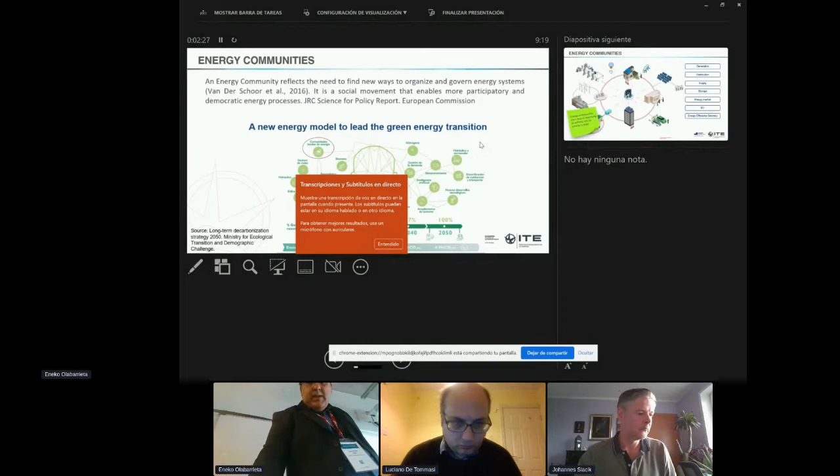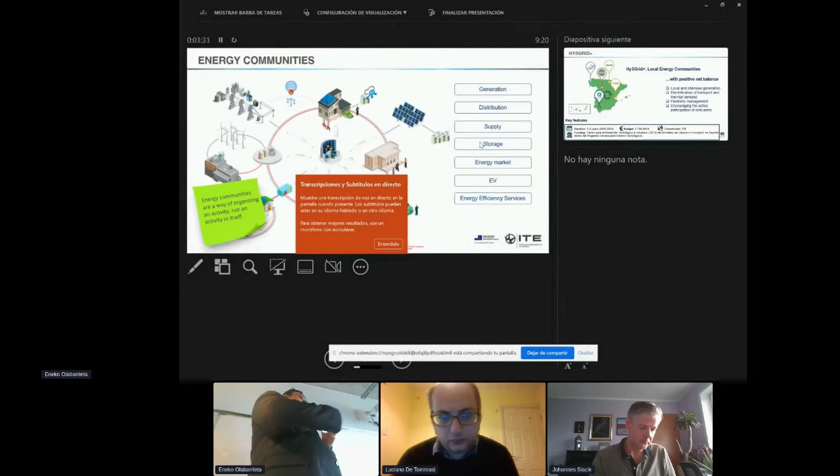Okay. Talking about energy communities, the energy communities are composed of several issues that I can show in this slide, such as generation, distribution, energy supply, battery energy storage. But in addition, we have an energy market relationship, electric vehicles, and energy efficiency services that are interconnected and related, not in an only relation itself, but in a mixed and hybrid connection.

Today we talk about the HySGrid+ project. The HySGrid+ project is a project granted by the Spanish government. It's an excellence network of Spanish technological centers. The concept is the Cervera Excellence Network is based on different topics where the different technological centers are specialized. In this case, we talk about hybrid energy systems.

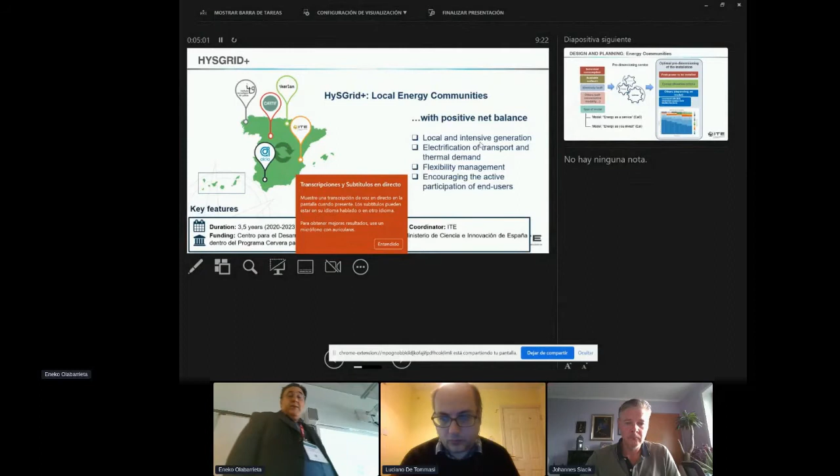The HySGrid+ project is based on local energy communities, but with the particularity of positive net balance. This implies not only the possibility of self-consumption, but the possibility to provide the DSO energy supply or assistance for any fault or problem in the grid. Okay. We can show different key features of the HySGrid+ project.

In the HySGrid+ project we studied different topics: forecast of generation and demand, the market system, the regulatory framework. But today we are focused on the design and planning of the energy community. The design and planning is based on the individual consumption, available resources, electricity tariff, and other parameters, and two types of models.

First of all, we need to pre-size the service using an optimal methodology to determine the best installation for each community. In this optimal pre-dimensioning, we determine the peak power required, the best energy allocation criteria, and depending on the model that we use, the best investment ratio, the generation surplus, etc.

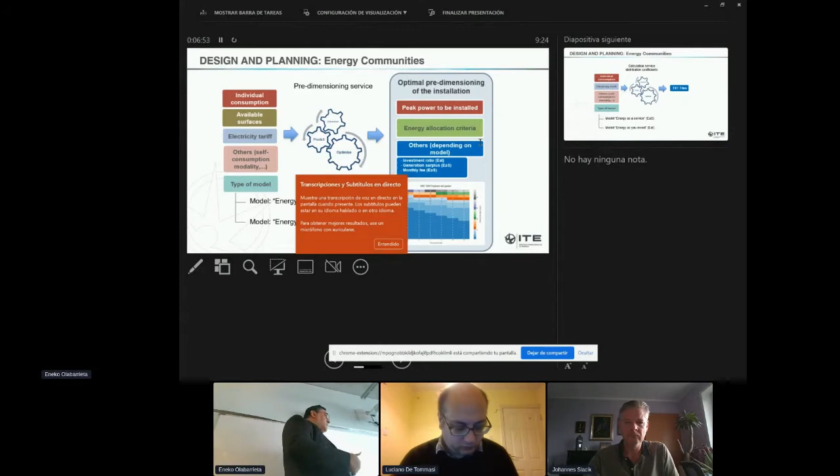In the case of the definition of the electricity tariff that we use in an energy community, it's important to define the distribution or partition coefficient that can be static or dynamic. It's an agreement that all the members of the energy community define prior to starting the operation of the energy community.

Okay, I mentioned to you that we have two models. The first model is energy as a service, and the other one is energy as you invest.

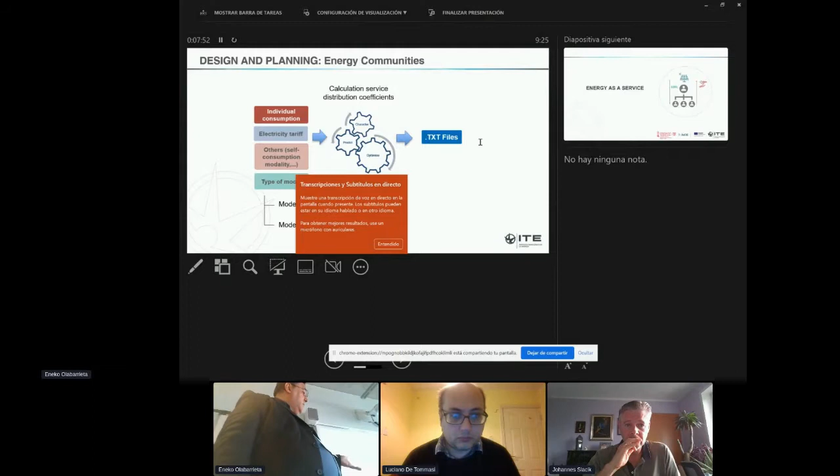Energy as a service consists, at gross mode, in defining a mathematical model where we use the aggregate demand and the energy capacity that can be provided for the energy community, plus the available budget and different possible scenarios, defined on an energy cost function.

This cost function we optimize using two criteria: maximize social benefit and maximize individual savings. And we have two main restrictions: prioritize the self-consumption of the members of the energy community and the reduction of energy poverty of the global community.

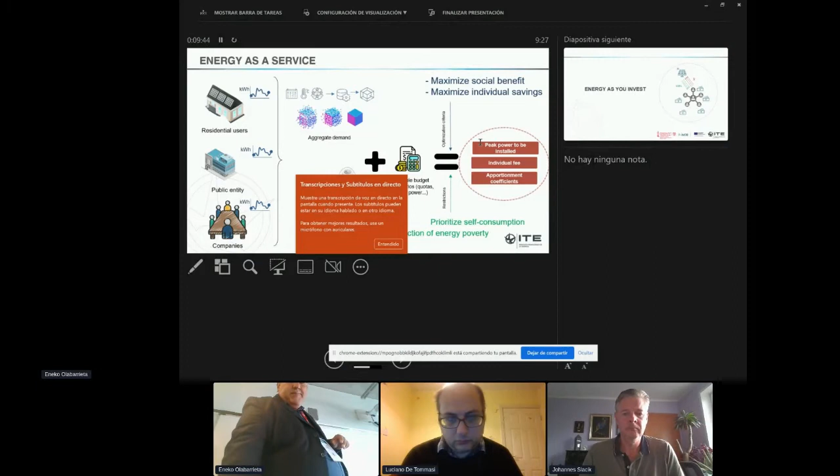The solution gives us the peak power that we need to install for our energy community, the individual fees, and the partition coefficients that we provide to the different members of the community. Another model, energy as you invest, consists of different mathematical models.

In which we consider only the individual demand profiles, the available budget, and the energy capacity of the community. In this case, the cost function optimizes...

one optimized criteria, which is to maximize individual profit in a fair way, and two restrictions: setting the investment percentage and setting the generation percentage. The solution gives us the peak power that we need to install, the investment ratios, and the partition coefficient.

As you can see, the great difference between the two models is that in energy as a service, you have a global profit that you can provide to the different members based on the previous agreement. In energy as you invest, your profit depends on your economic contribution or your generation contribution.

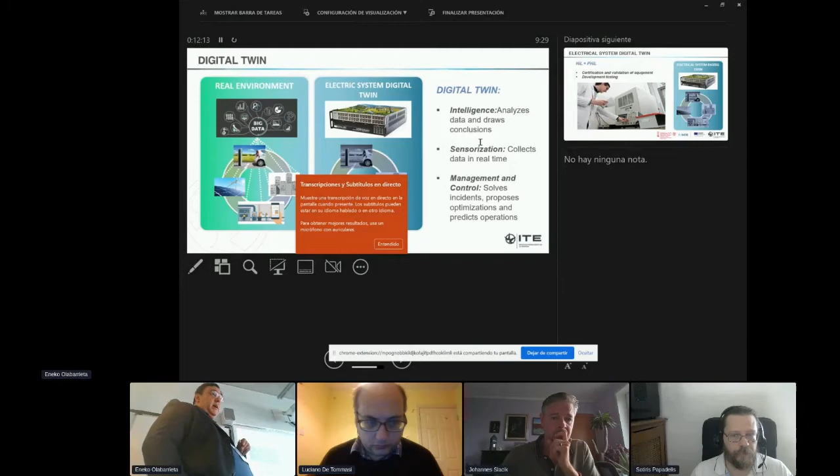based on the monitoring and management of the different parameters of the energy community, and the electrical digital twin, which consists of hardware-in-the-loop and power-hardware-in-the-loop tools to certify and validate the equipment that we use, and the testing of the different developments that we can provide to the community.

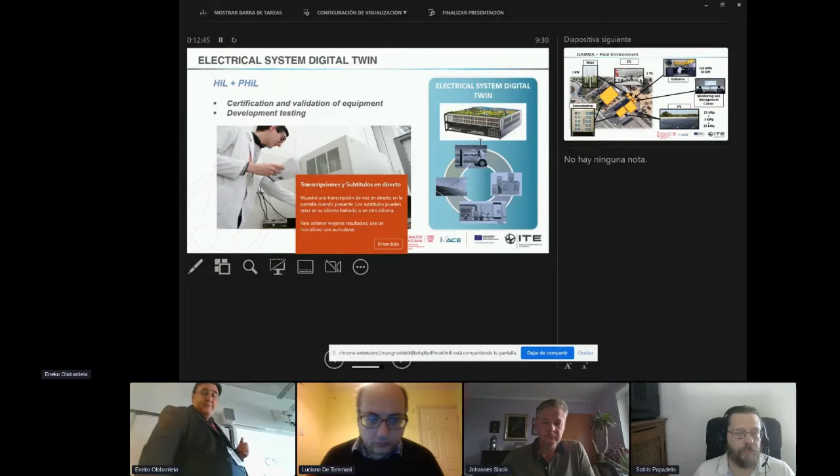This is possible because in ITE we have a real environment that consists of photovoltaic strings, a wind generator. We have two charging stations for electrical vehicles. We have energy battery systems, and we have a control center. We have on this slide the different features of our installation.

And this makes it possible to combine the physical environment with the simulation environment.

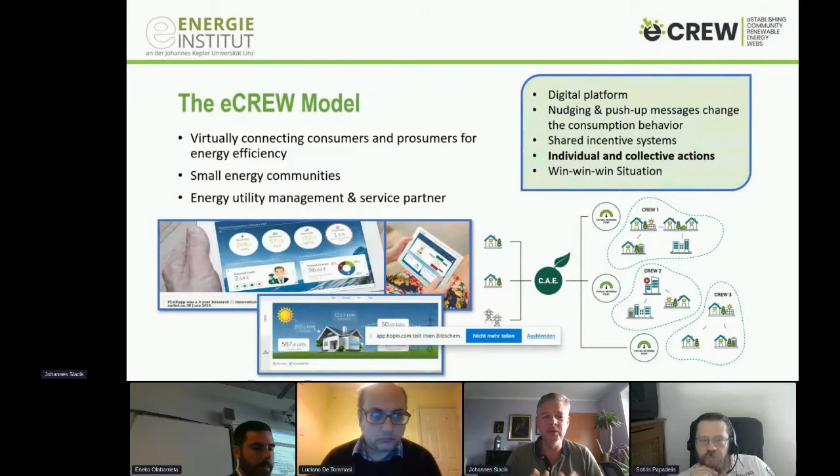And this in particular, I think, fits this workshop. On the one hand, or on the other hand, it also creates a new opportunity, a new business model, so to speak. So what did we do here in this study? We basically created a virtual platform, a virtual app that energy communities can use, where consumers and prosumers are virtually connected, which means you apply, you sign up, you sign a contract, in this case, in particular, with the energy utility who is managing this app.

So there is a very big partner actually for energy communities that we foresee, namely, well, the local, so to speak, energy retailer or energy utility management. They can service this virtual platform. They can gauge the energy flow. They can secure also the energy demand response in this sense, and also the demand management. Which means if we do not have enough, let's say, solar energy within our energy community, then of course we can feed in from the energy utility.

On the other hand, if there may be, on a great summer day, excess energy, prosumers within an energy community can sell that energy back to the energy utility. This allows for shifting the peak loads. This is a big problematic situation within this energy transition, due to such high energy demand that we have such energy peaks.

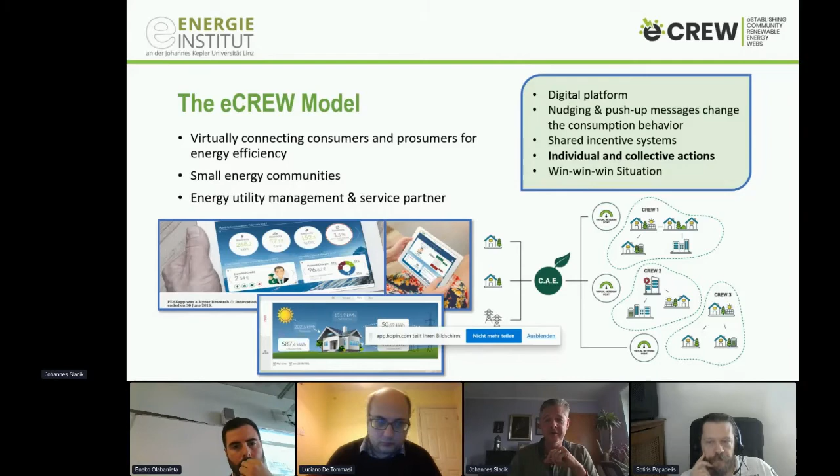Well, at least probably in the summer months, which means they also stay connected with the consumers in the sense that, because of these push-up messages, they can shift these peak loads. So they can ease out a bit of this energy pressure, of the demand pressure actually, by connecting with, in this case, virtual energy communities.

To go on, originally we had created a sort of prototype, an app that was meant to show: can we change the energy behavior, the consumption behavior of consumers. With this app and this study, we recognized that because of push-up messages, nudging, and also gamification incentives, we can very quickly and easily influence customers' decisions, and in this case, reduce the energy demand at certain points.

Or if we have, for example, a very sunny day and a lot of PV power available, to increase the energy use or the energy consumption at a certain time.

For example, midday on a very sunny day, we load our car, or we heat the pool if necessary, or we do the laundry, and so on. So here we proved that we truly can influence customers' decisions and create a behavioral change in energy consumption.

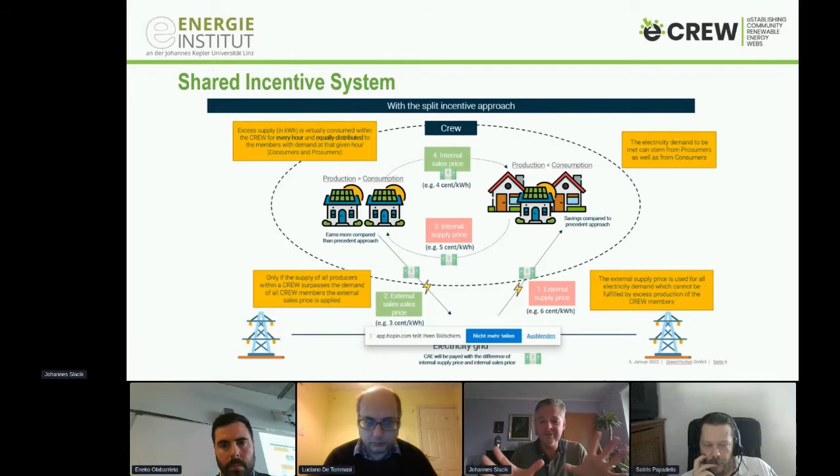This makes the energy utility greener to a certain degree, and also allows it to purchase energy from the consumers and prosumers at much cheaper tariffs or based on contracts. So because of this split incentive system, we finally create this win-win-win situation. If you have any questions about that, we can perhaps talk about it later on. But this is, in a sense, our business model that we are trying to create.

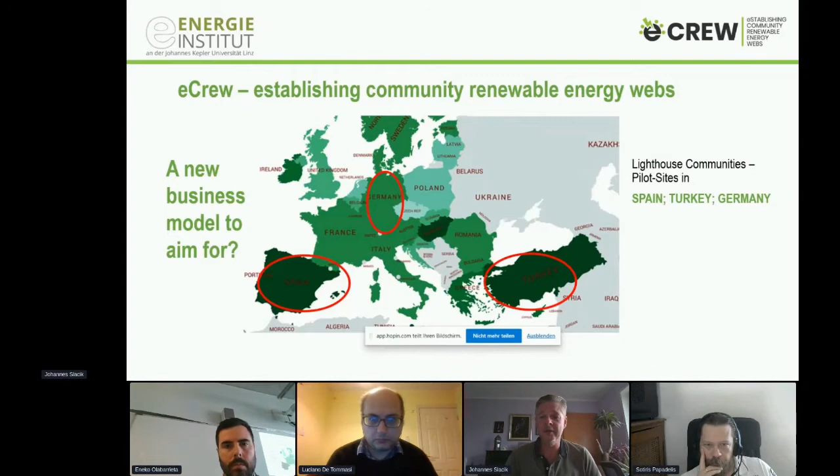For that, we set up three lighthouse communities - one in Turkey, one in Spain, and one in Germany - to try to establish how this is going to work. In Spain, we already have members, as all eCrew models in the lighthouse communities have just recently been rolled out within the last few weeks. In Spain, we now have about 12 members.

In Turkey, we have by far the most members, more than 1,800. However, about 250 of those members do not have smart meters, so they signed a contract, but we unfortunately cannot actually work with them or their households because we cannot read their consumption data. Then we have a German lighthouse community in Bavaria, where we currently have 102 members, 50 of whom are already using the app and really engaging with it.

They get the push-up messages from their energy utility already. They react on it. They take in from the community the prosumer distributed energy, so to speak, so the green energy at a much cheaper rate. And we have first data available on that, how the system is working.

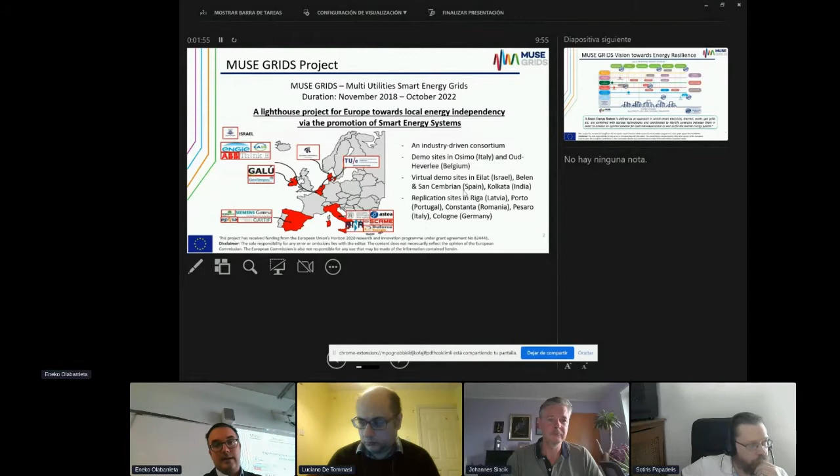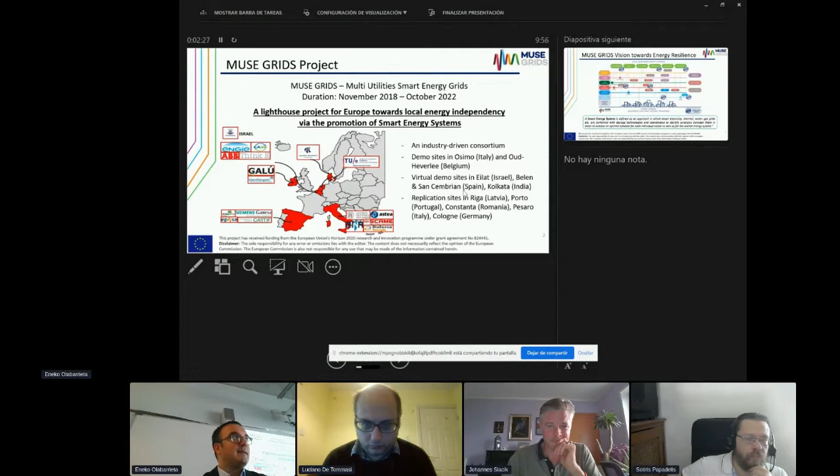Then, both in the virtual demo sites and in the replication sites, which are in Riga, Porto, Constanta, Pesaro, and Cologne, these 5 cities with different features, we are testing the use of an IT tool that we have developed together with the University of Aalborg. It is an improvement of the EnergyPLAN tool developed by Aalborg University in order to plan the transition of cities and districts towards renewable energy supply. We will see the details later.

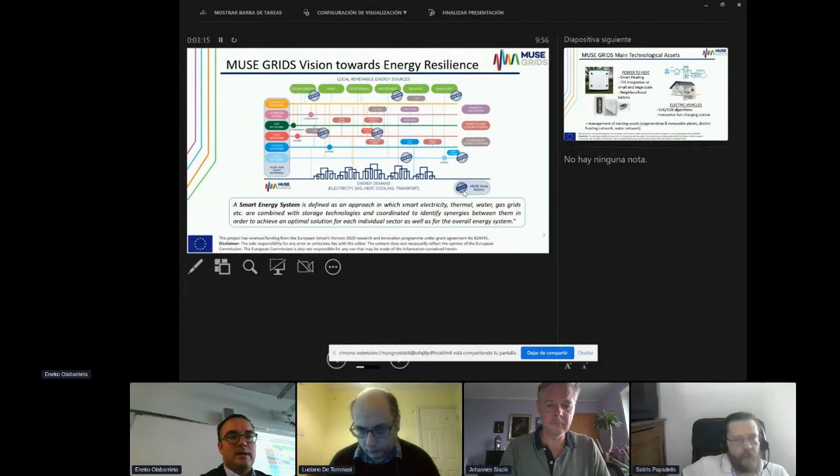As I was saying, this project is mainly about smart energy systems. We are targeting different energy systems and different renewable energy sources. This slide is, in my opinion, the most important of the presentation, since it represents the different energy systems that we are studying and making tests and demonstrations about, and the different renewable energy sources. We are working on electricity networks, the hydrogen system, natural gas networks, district heating networks, cooling networks, water networks, and to do that we are exploiting solar energy, wind, geothermal, waste heat, biomass, and mini hydro.

Traditionally, these energy systems were considered as separate, one from the other, but several technologies exist, highlighted here in this slide, that can couple these sectors, and you can see highlighted those where we are working in MUSE GRIDS. We want to create in MUSE GRIDS a smart energy system, which we define as an approach in which smart electricity, thermal, water, and gas grids are combined with storage technologies and coordinated to identify synergies in order to achieve an optimal solution for each individual sector and for the overall energy system. So to minimize primary energy demand, to minimize greenhouse gas, so CO2 emissions, and to minimize energy supply costs.

Some of the technologies that we are testing in MUSE GRIDS that help in coupling the sectors are, for example, power to heat and electric vehicles. We are using different types of power to heat devices to carry out smart heating of buildings, to exploit the excess from renewable energy production, mainly from solar, to produce heat, store it, and provide it to the final user when needed. We also have a neighborhood battery for electricity storage in the demo in Oud-Heverlee, and a large thermal energy storage system in the Osimo demo site. I will show you later the results of the implementation of these technologies in the 2 demo sites.

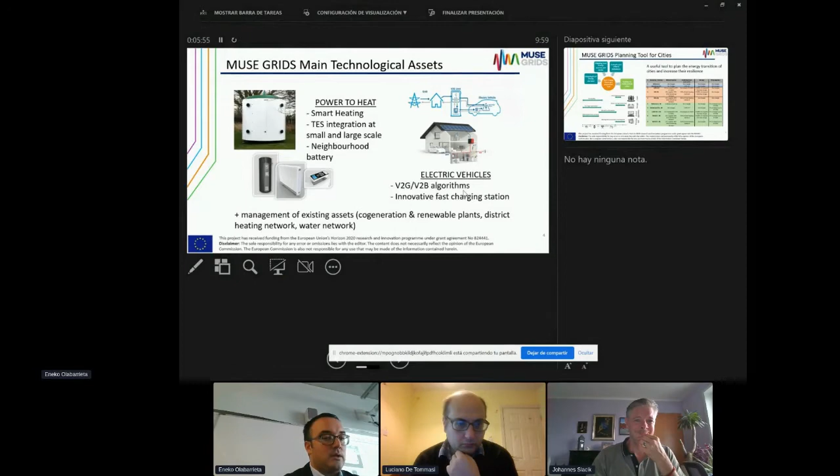In addition, we have electric vehicles that not only allow reducing fossil fuel consumption, but are also exploited for vehicle-to-grid and vehicle-to-building applications. So we are using our vehicles as additional electricity storage for the local grid and for the buildings. In addition to these 2 clusters of innovative technologies, we are managing a lot of existing assets in the 2 demo sites that include cogeneration and renewable power plants, the district heating network in Osimo, and the water network, again in Osimo.

Another important point of the project, as I mentioned earlier, is the development of a planning tool for cities, the MUSE GRIDS tool, an upgrade of the EnergyPLAN tool developed by Aalborg University. This tool puts together algorithms for the mapping of the local energy demand, and for the mapping of potential local energy supply in terms of sources, geographical distribution, and time distribution. It allows defining and creating scenarios to simulate, and can then be applied to MUSE GRIDS cities.

We are applying it to the virtual demo sites and to our replication cities, but you can download it from the MUSE GRIDS website and use it for your case study. For example, here on the right, you can see the scenarios that we are modeling for Osimo, one of our demo sites.

We are modeling, for example, the reference scenario, the baseline, with no changes in the energy systems. Then we are modeling an increase of individual heat pumps in the system. We are modeling some scenarios with an increase of the penetration of district heating in the local energy systems, an increase of renewable energy sources, an increase of heat pumps plus renewable energy sources at a different extent, and then we also have some scenarios with electric vehicles and a combination of electric vehicles, heat pumps, and additional renewable power.

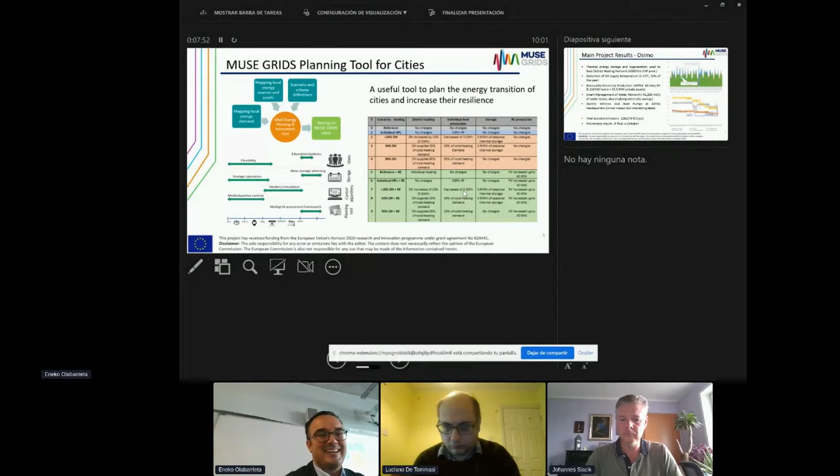Of course, it was too much to put in one single slide. Let's go to the results of the project. Here, I'm briefly summarizing some of the results related to the Osimo demo site.

Here, the main technologies that we have are a large thermal energy storage coupled with a cogeneration plant, and the main result is that the operation hours of the cogeneration plant could be increased by 900 hours per year, so more or less by 10%, thanks to the presence of this storage, because, as you can see in the chart on the right, we managed to produce heat and consequently also electricity in the periods when the heating demand was lower, thanks to the storage system that could be filled with the produced hot water.

Then, thanks to the application of an algorithm for modeling a district heating network developed by Cartif, we managed to reduce the district heating supply temperature by 5 to 15 degrees for 50% of the year, and this also allowed a strong reduction of the primary energy demand and of the CO2 emission for district heating in Osimo.

Then we have a significant electricity production from renewable sources. We have, as assets managed by the demo responsible partners, 80 kilowatt of photovoltaic plants and 110 kilowatt of hydropower. Plus, there are in the area 33 megawatt of private renewable assets, mainly solar, but also biomass and biogas plants.

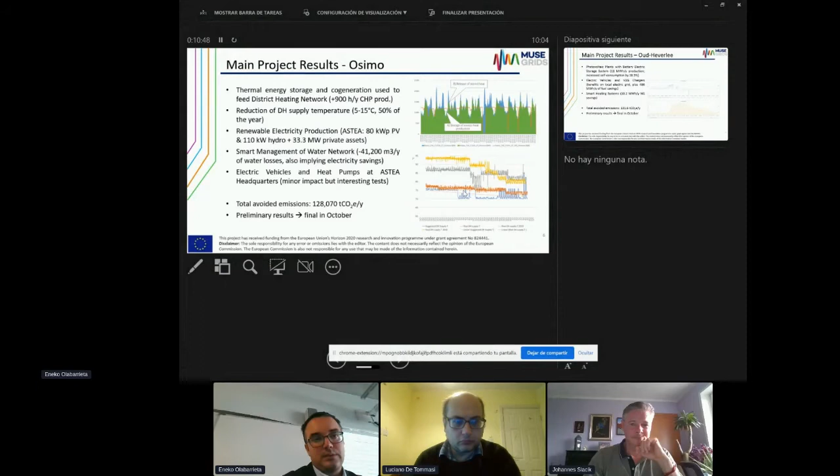We will publish at the end of the project a project handbook that I invite you to download from the website of the project, and it will collect all the experience developed within these 4 years of project. Now let's move to the second demo site, and let's approach the end of the presentation.

The main project results for the demo in Belgium, Oud-Heverlee, are related to the integration of electricity storage systems in the local energy grid. I need to anticipate that this is a really small village. It is mainly one road with 20, 30 houses, I don't remember. And they initially had problems with electricity supply since they have only one connection point and they suffered from blackouts or lack of power. So this is not only to reduce CO2 emission and improve the environmental aspects, but also to increase the security of supply for this district.

The buildings in this district have photovoltaic plants. We have added some battery electricity storage systems, thus increasing the electricity self-consumption of the photovoltaic plants by 38%. In addition, we have some electric vehicles and vehicle-to-grid chargers that allow benefits on the local grid since they constitute an additional battery-based storage system that increases the self-consumption of electricity from renewable sources and provides benefit to the local grid. We can see on the right, it is a bit small, I think, yes, sorry for this.

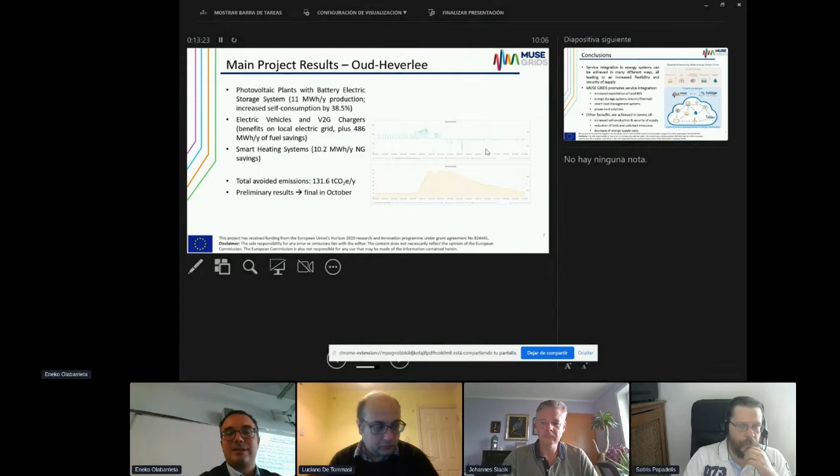The results, of course, this is a much smaller demonstrator compared to Osimo, with a reduction of CO2 emission by 131 tons per year of CO2. These are, again, preliminary results. Final results will be available in October.

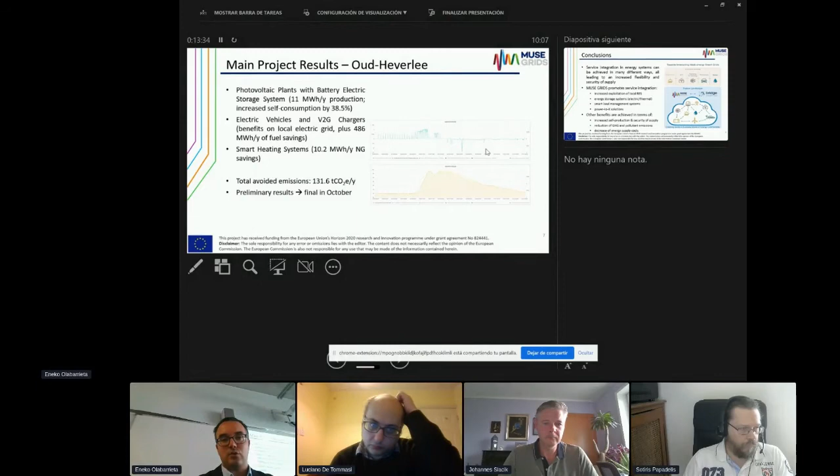To conclude, we have seen in this project that there are many ways to achieve service integration and integration among different energy systems. And all of these solutions can lead to an increased flexibility of these energy networks, energy systems, and to an increased security of supply that today is a trending topic also for the geopolitical situation.

We are promoting in MUSE GRIDS service integration through an increased penetration of local renewable energy sources with energy storage systems, both electric and thermal, the smart management of some loads, and power-to-X solutions. All of this is providing benefits in terms of increased self-production, security of supply, as I have mentioned, reduction of greenhouse gas and pollutant emission, and decrease of energy supply cost, which is also an important topic today.

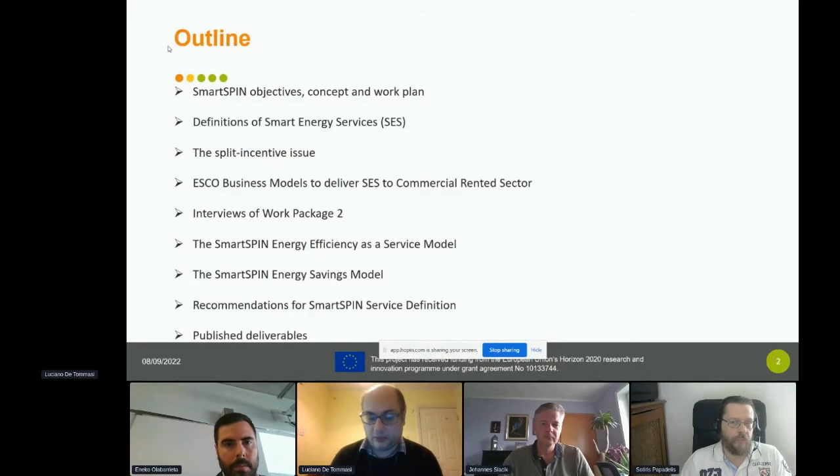This work I'm going to show in this presentation is out of Work Package 2. Then talk about the energy efficiency as a service model and the energy savings model, and some recommendations that we have obtained out of the Work Package 2 research. We'll also show a list of published deliverables which are available on our website.

Okay, so the SmartSPIN objectives are, first of all, demonstrating the feasibility, the effectiveness, and the advantages of a business model that can deliver both energy and non-energy benefits through smart services offered to the commercial rented sector in Europe, of course. We are going to address the barriers that prevent the commercial rented sector from engaging with the energy service companies and implementing energy efficiency measures, and also the performance-based contracting.

We also have tasks related to big data utilization to actually design better control systems of energy consumption in buildings, and to measure accurately the energy savings. This is part of Work Package 4. Then we have another goal, that is to design new contractual templates. So this business model will not only be an abstract model, but will be usable through the templates that will be designed to deploy the smart energy services.

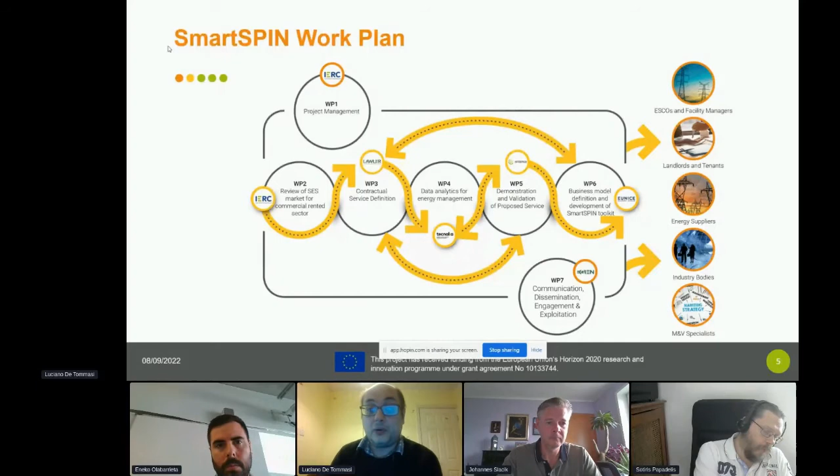And then work package 6 will be about the business model definition. So work package 6 actually starts now, in year 2. We will use the previous recommendations and the service definition to formalize the business model. And then we have, of course, communication, dissemination, engagement, and exploitation activities.

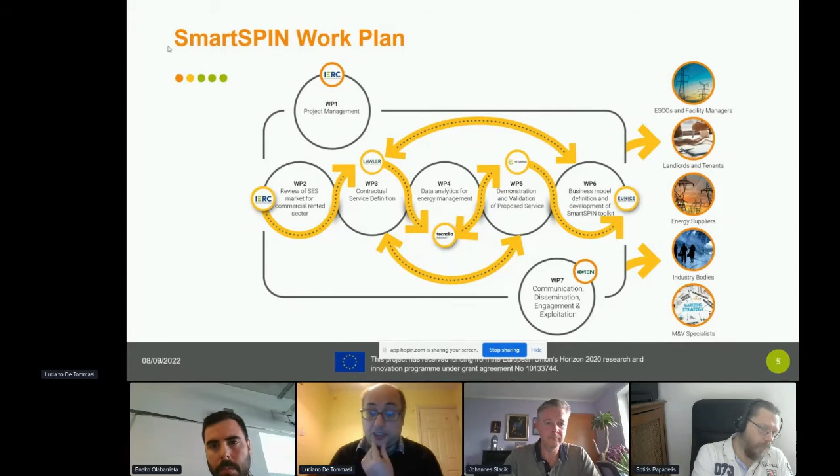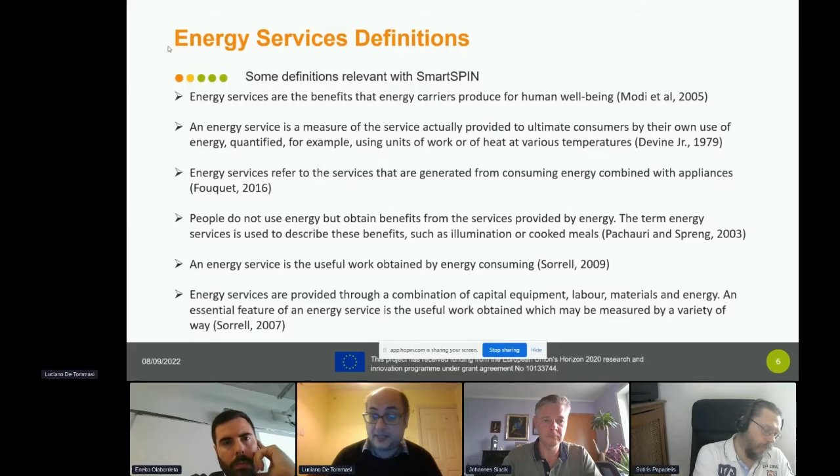Energy services, as you know, there are several definitions in the literature. The one I like the most is maybe the last one. Energy services are provided through a combination of capital equipment, labor, materials, and energy. An essential feature of an energy service is the useful work that can be measured in a variety of ways, definition given by Sorrell. In our case, we also consider energy services that are a combination of capital equipment, labor, materials, and energy.

But the issue that we face in the sector is the split incentive. And the split incentive occurs where the benefits of a transaction, which in this case is the installation of energy efficiency measures, do not primarily accrue to the person who pays for it. So if the landlord is paying for the energy efficiency measures, he will not enjoy the benefits because the energy bill is paid by the tenant.

And also the Energy Efficiency Directive, in Article 19, is recognizing the importance of addressing the barrier of split incentives in the building sector. So this is a well-known problem at the level of the European Commission, and the issue is the absence of rules for dividing the costs and the benefits between the parties.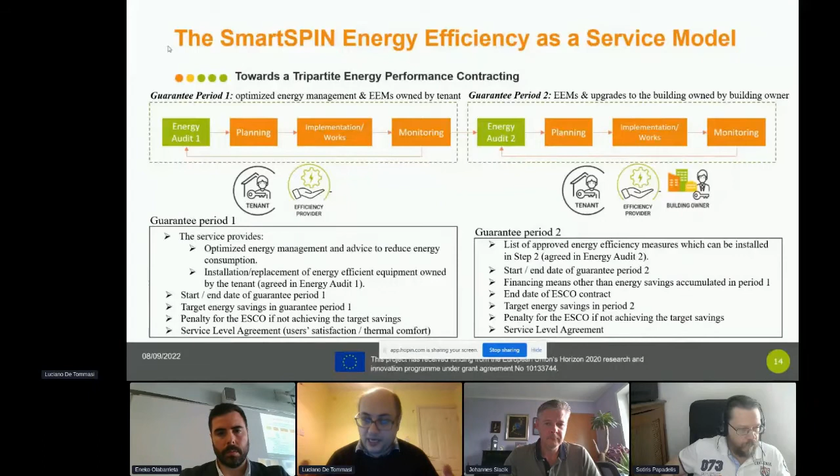And after guarantee period number 2, as you know, the contract with the ESCO ends, and the building owner or occupier earns all the savings from the project.

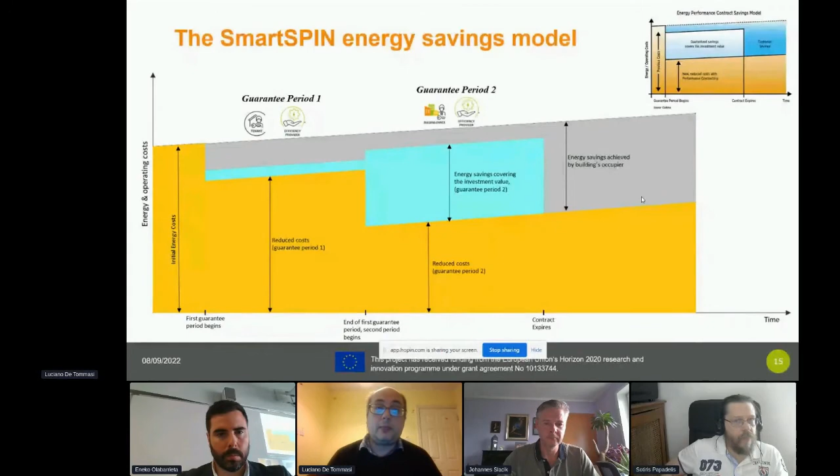What are the recommendations that we have provided to the colleagues working in work package 3 of SmartSpin? Energy as a service, or energy efficiency as a service, covers energy management, maintenance, a total guarantee of equipment, improvement works, and improvement of energy efficiency. This is similar to energy performance contracting.

The SmartSpin service, in terms of what it covers, includes energy management, opportunities in switching the electricity supplier—maybe to one that is cheaper—installation of energy efficient equipment or renewables like solar PV, installation or replacement, and also operation and maintenance services.

Another recommendation is to establish a measurement and verification process which is standardized, ensures no measurement errors, and is trusted by stakeholders, because lack of trust in the M&V process might be a barrier in deploying energy efficiency as a service in the commercial rented sector.

We also find that green leases are maybe the basic tool to allow engagement of landlord and tenants for improving sustainability and energy efficiency in rented commercial buildings. This means that when the landlord and tenants sign a contract for renting the building, they add clauses related to sustainability and energy efficiency that allow them later to plan improvements in energy efficiency and to get the energy and non-energy benefits previously mentioned. There are two cases relevant to the service.

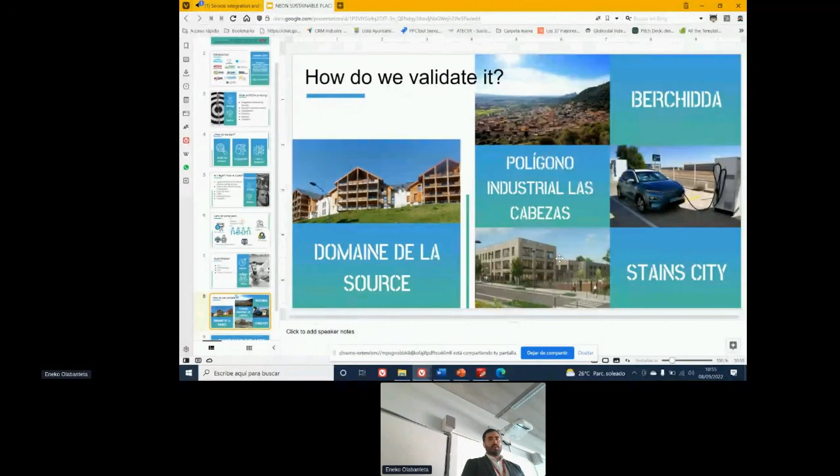Some of them are fully residential, some of them are industrial mixed with the residential ones with electrical vehicles, and there is one specifically, Stains City, which is fully office and industrial environment. So we do have a really very good bunch of situations to test these technologies.

So this is a really big presentation from the NEON project.